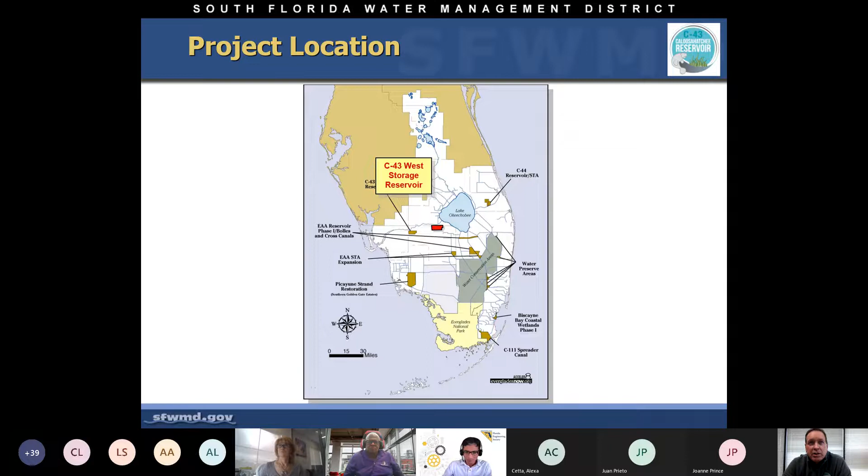Quick overview of the project location. It's located west of Lake Okeechobee, about halfway between Lake Okeechobee and Fort Myers, just south of the Caloosahatchee River. As we zoom in on the project location, again about halfway between the lake and the Caloosahatchee estuary.

There's a 10,000 acre footprint of a 2-cell reservoir planned, and it's under construction right now, just south of the Caloosahatchee River. It takes water out of the Caloosahatchee River that discharges or intakes into the reservoir. It captures basin flows out of the river, as well as Lake Okeechobee discharges, hopefully to diminish the amount of discharges that currently go out to the northern estuaries and south through the southern counties of Florida, to help improve environmental conditions in the estuary.

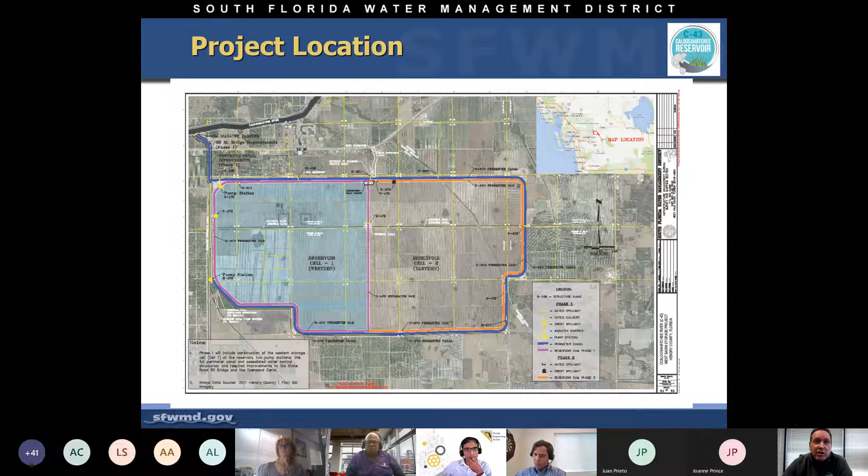An interesting note is that this reservoir is about half the size of the city of Boca Raton. It's almost 18 square miles in footprint, so it's a very, very large contract.

The main reason we're doing this project, it's a CERP project, number 1, so it's a Comprehensive Everglades Restoration Plan project. It's designed to improve the timing and distribution of flows into the Caloosahatchee estuary with attendant benefits throughout South Florida.

It was originally designed under Acceler8, back in the early 2000s, when the Acceler8 program had 3 major reservoirs: the C43, the C44, and the EAA A1 reservoir. This component had 170,000 acre-feet of storage, which is, if you had an acre of land, it would stretch 170,000 feet high into the sky. That's how much storage is captured in this reservoir.

It takes in the wet season flows and discharges them during the dry season to maintain minimum flows and levels in the C43, which thereby improves the salinity regimes within the estuary, improving the ecosystem.

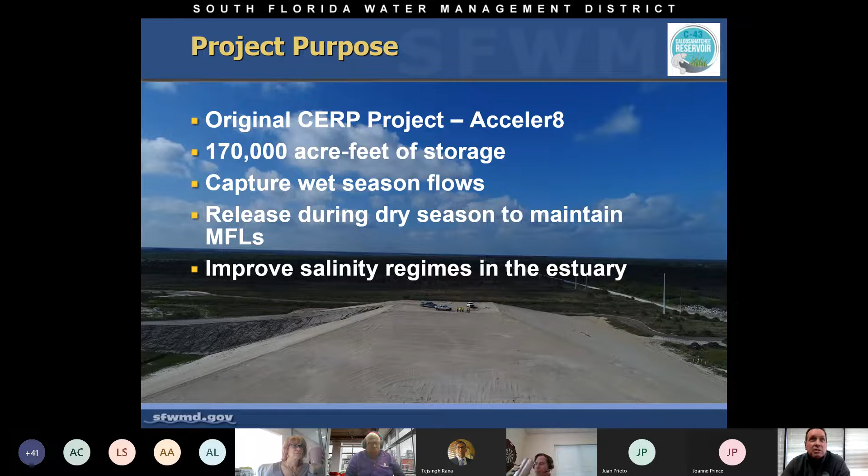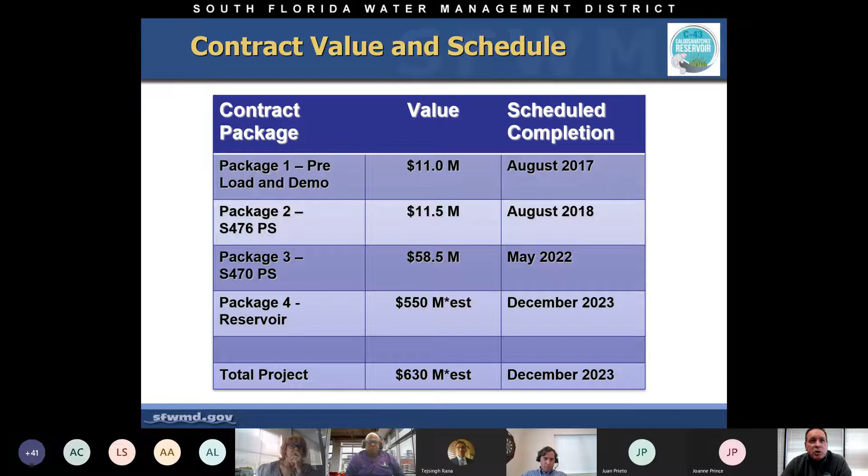As I mentioned, there were 4 major contracts that total about $630 to $650 million as of today. The total project budget is about $1 billion, which includes land, engineering, and a host of other smaller contracts that were advanced ahead of the Package 4 reservoir contract.

The reservoir, again about 10,000 acres or so, has more than a dozen water control structures, most of them pretty major, including the S470 reservoir pump station that we'll get into in a minute. That pump station is located right next to the Townsend Canal, the main conveyance feature south of the river, and it's designed to capture up to 1,500 cubic feet per second and discharge it into the reservoir. It'll take approximately 60 days at round-the-clock operation during the wet season in order to fill it.

The idea is to fill it about once every year and drain it once every year during its operational cycle.

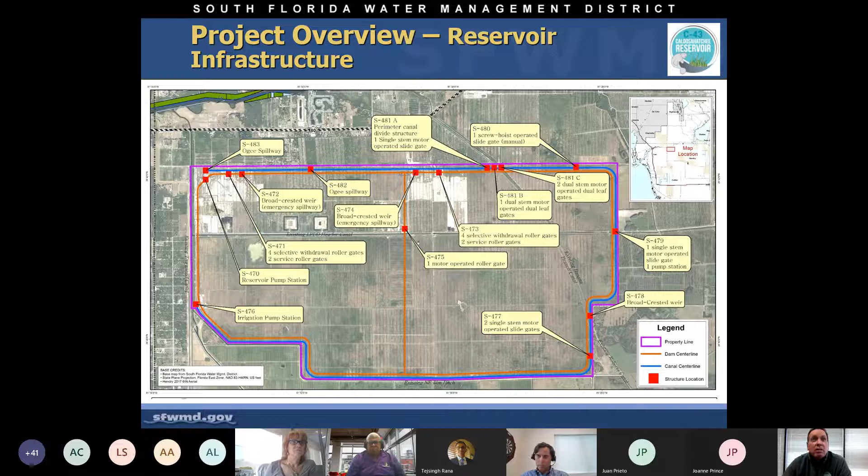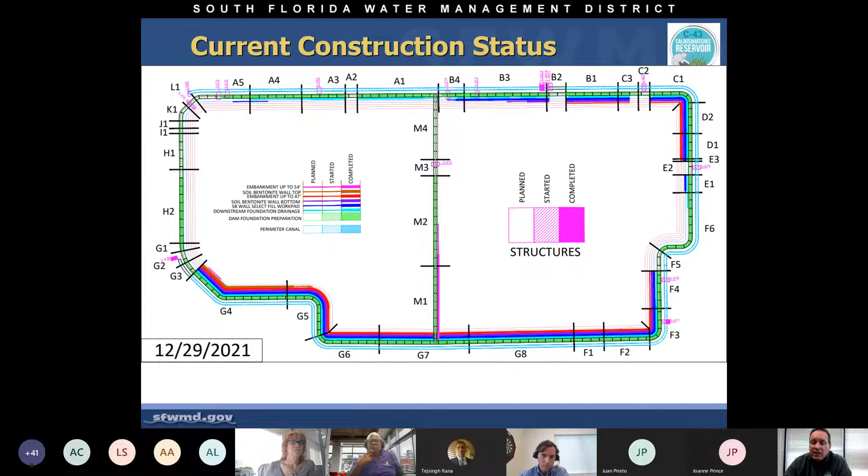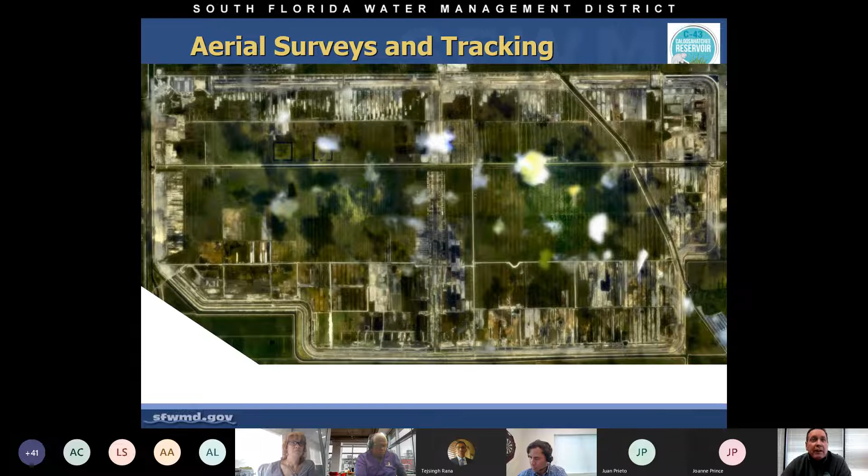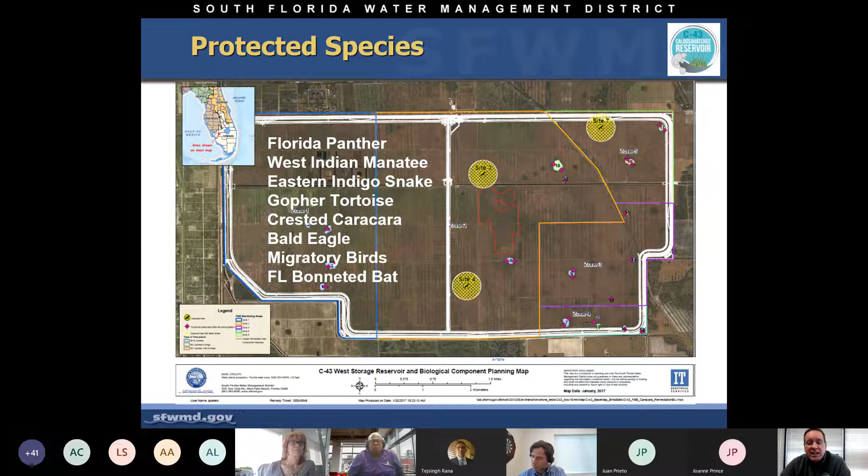Let me tell you a little bit about some of the protected species we've seen on the project. We've seen practically all the threatened and endangered species on the list for South Florida, including the panther, manatee, eastern indigo, gopher tortoise, and the like.

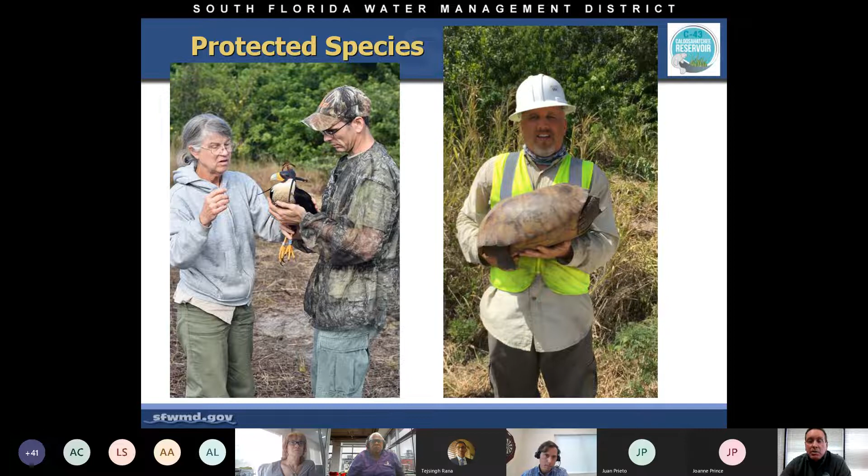In fact, we found one of the largest gopher tortoises recorded in South Florida on our project site, and she got relocated to a recipient site and is doing well. We have a family of panthers on our site as well, so that's pretty exciting.

The original design, as I mentioned, was completed during Acceler8, picked back up in the Restoration Strategies program for the district in 2014, and due to updates in the dam safety criteria after Hurricane Katrina, the project went through a total redesign for the reservoir dam facility.

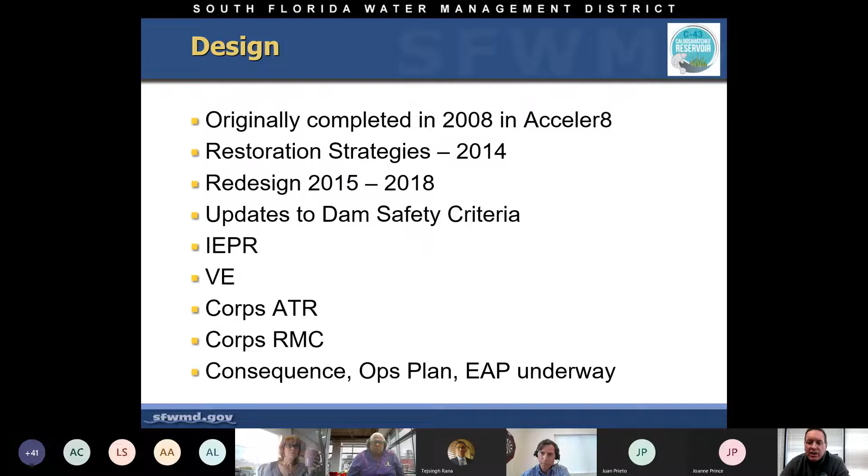We conducted IEPRs, which is the independent peer review, value engineering, and all of the Corps reviews necessary to pass scrutiny through the dam safety group. In consequence, dam breach and ops plan EAPs, which is emergency action plans, are currently in development.

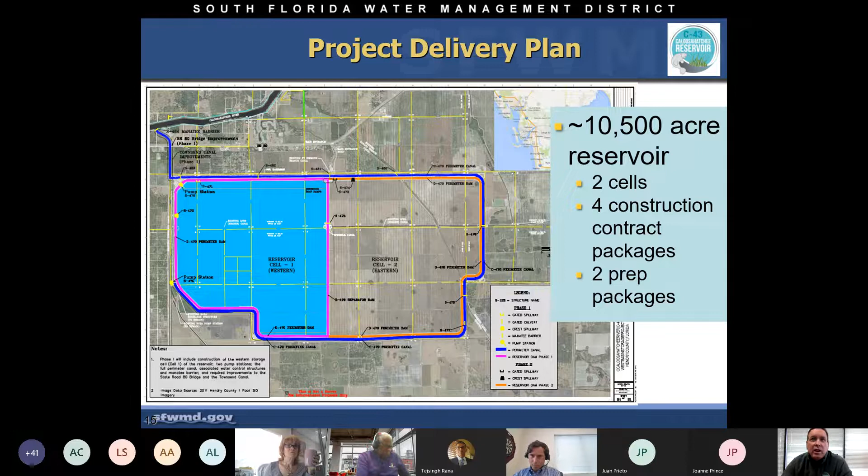Let's talk a little bit about the project delivery plan, the 4 major contracts for the work. This included what we call package 1, which was a preload and demo contract conducted 3 or 4 years ago now.

That was primarily to preload all of the structure sites within the reservoir dam footprint to consolidate the clays, which I'll get into in a little bit in the presentation, but to consolidate the clays so we could minimize the amount of future settlement once constructed.

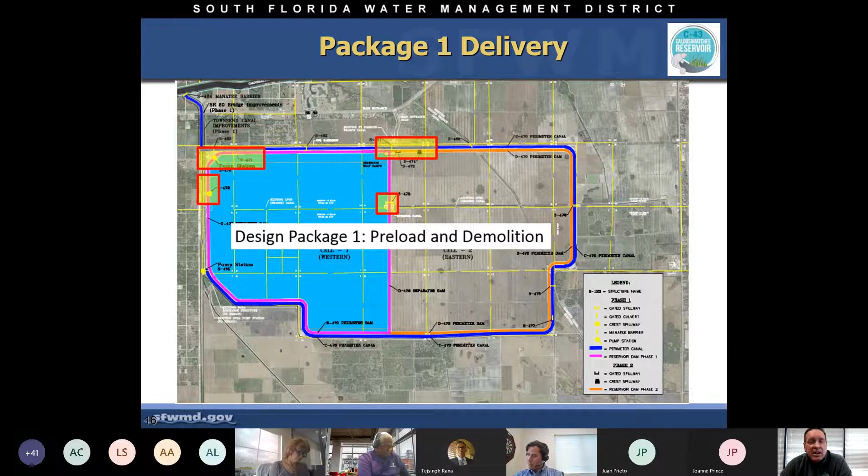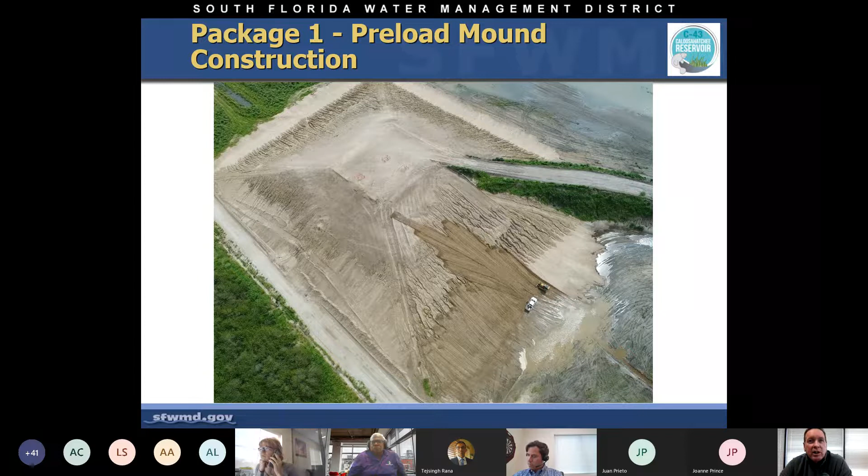These mounds were pretty large. They were 250,000 cubic yards each. They covered a footprint of almost 7 acres and were on the order of 50 feet high. Here's another picture just showing one of those mounds for one structure on site.

Those mounds were left in place for about a year or so in order to take out, again, the settlement due to clay consolidation. And we monitored those settlements for each of those mounds.

On this graphic, you can quickly see that the fill height, which is the orange line, as the fill was being placed, the settlement of the ground surface was induced up to almost 20 inches of settlement at each one. So you can imagine a structure in the dam settling 20 inches - that probably wouldn't be too good.

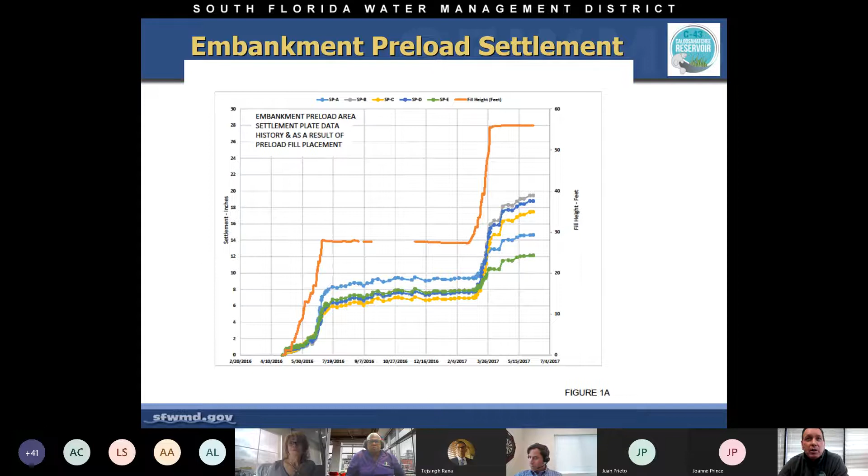So we took out the settlement and we monitored the clay layer to make sure that we dissipated the pore water pressures, and that's what this graphic shows.

Again, the fill placement through time, and then the representative piezometer readings. So as time went on, you can see the piezometer readings or the pore pressures dissipated, and that's what we're looking at during construction to make sure that the dam, as it's being built, settles as we predicted.

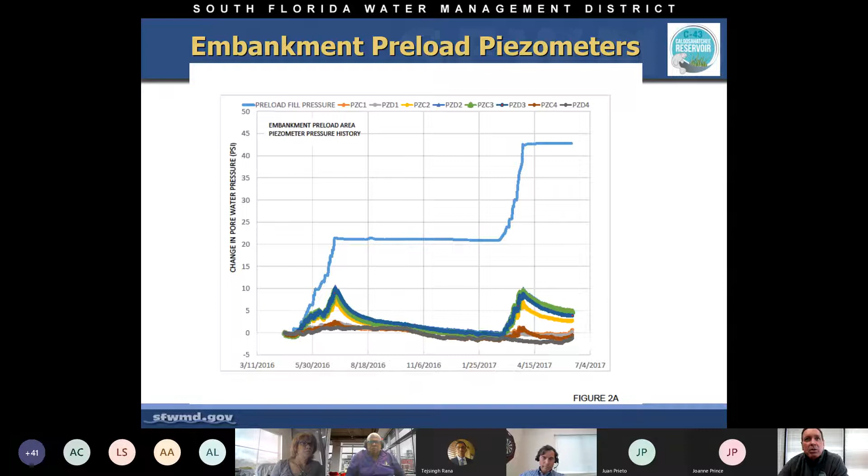Package 2 was a small, relatively small 200 CFS pump station. Its purpose is to tie in the southern perimeter canal, which is the southern blue line on this reservoir picture, to reroute water supply that had originally gone through the reservoir to the east. And that was critical because we had to maintain that water supply to the farmers on our eastern neighbor border.

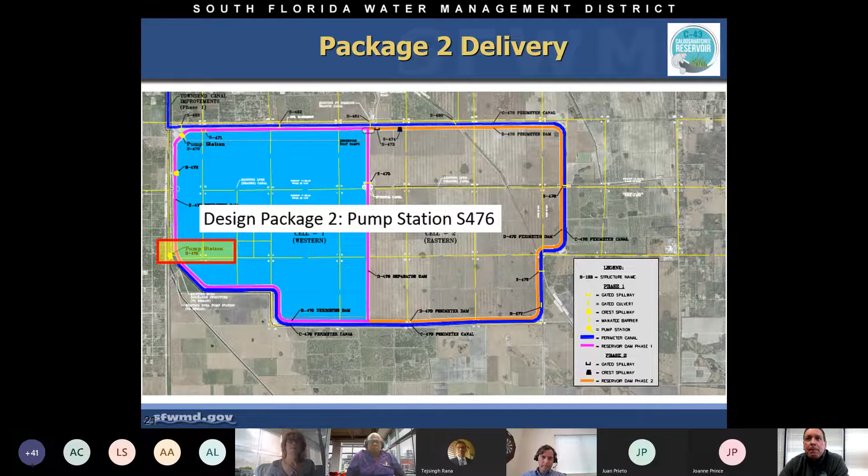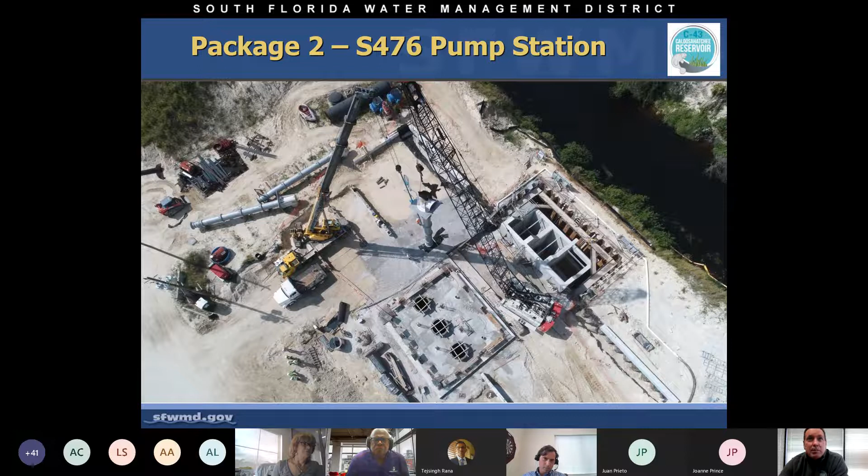This pump station was built a couple of years ago and is in operation. These are just some photos—I like photos better than lots of words. We had 3 vertical pumps at about 65 CFS each to give us close to 200 CFS capacity. You'll see a lot of our photos make use of drones, since everything's so big that the only way to really capture it is through drone imagery.

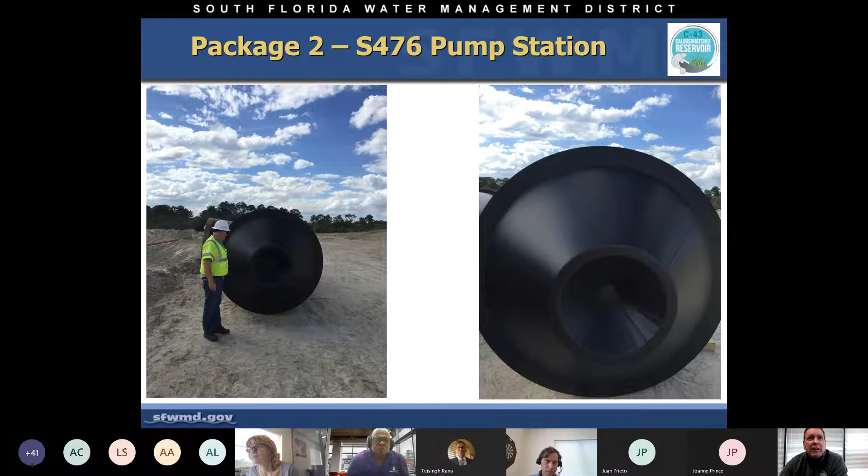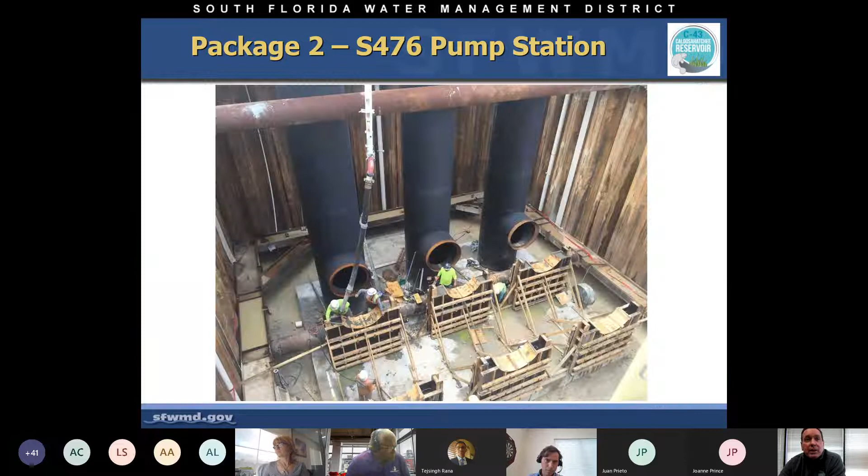This is an example of the pump tube, about 5 feet in diameter. This is a picture right from above as the concrete pump is pumping the concrete mix into the foundation for the pump station. Then we set the tubes, and this is the finished product.

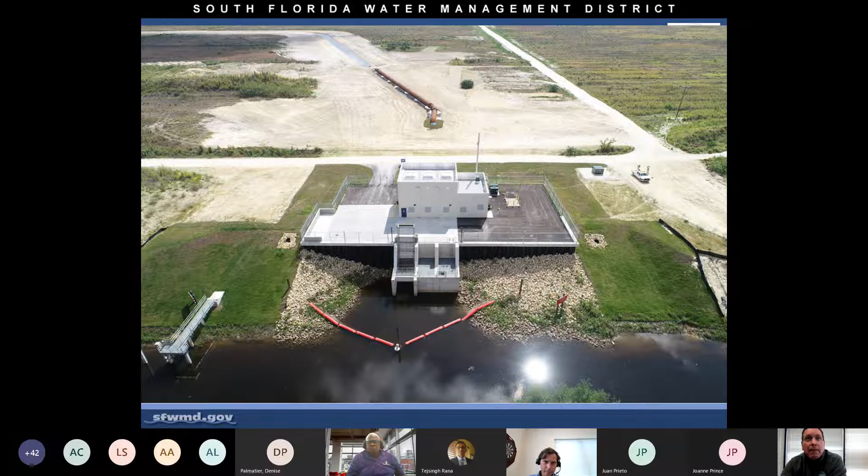The canal in the foreground is the Townsend Canal. It extends all the way past the intake at 470, which is the primary intake structure, and continues south to agricultural interests on the southern border as well. In the interim, you can see the orange pipe in the background—that's a 6-foot diameter pipe that discharges into a temporary bypass canal so we could maintain that water supply into the eastern properties.

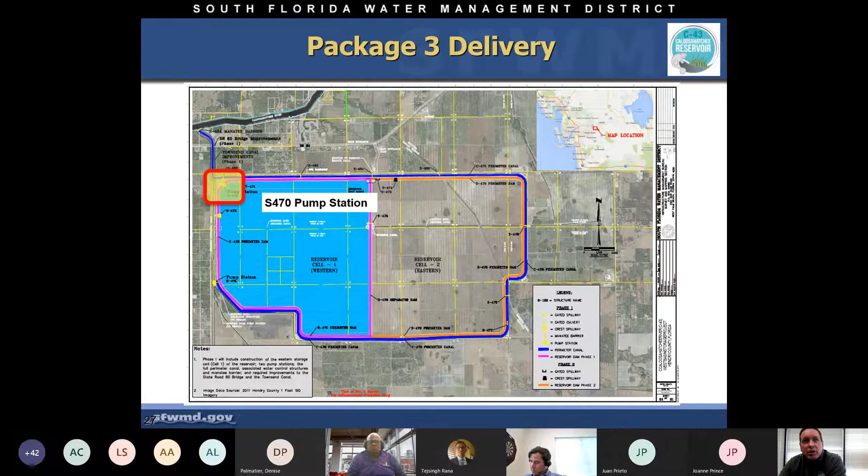Package 3 delivery was the S470 pump station, at the northwest corner of the reservoir. That was to take water out of the Townsend Canal, the dark blue north-south line that connected to the river, with the intent to discharge up and over the embankment. The pump station is built under package 3, while the embankment is built under package 4, so there's a lot of coordination between those two. Eventually, when the dam gets completed near the pump station, we'll install the pipe and connect it to the reservoir.

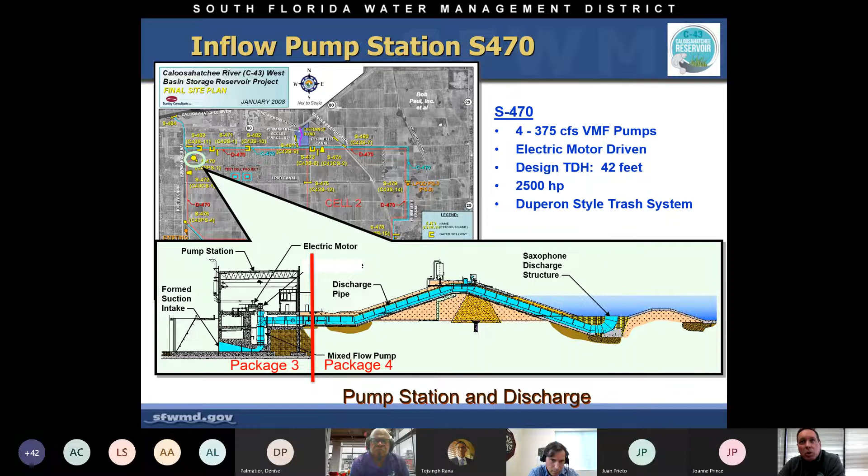There are 4 pumps at 375 CFS each, electric motor driven, with a total dynamic head of 42 feet. What's spectacular about this project is that each of those pumps is a 2,500 horsepower electric motor. We'll get into what we had to do about that in a second.

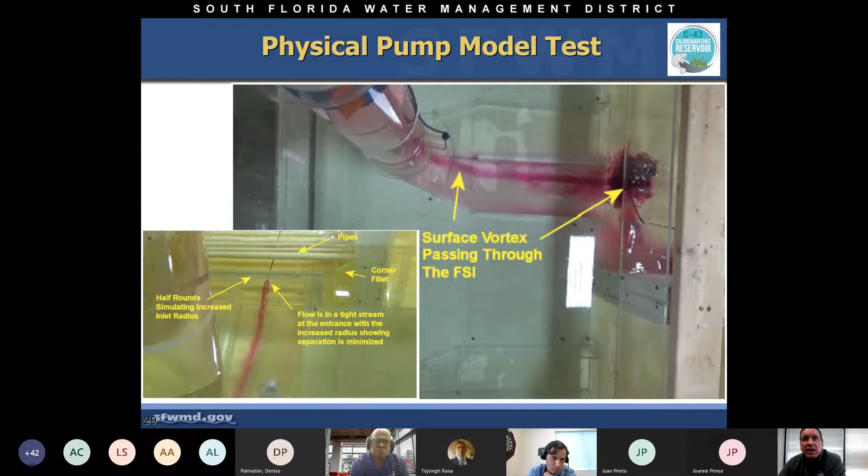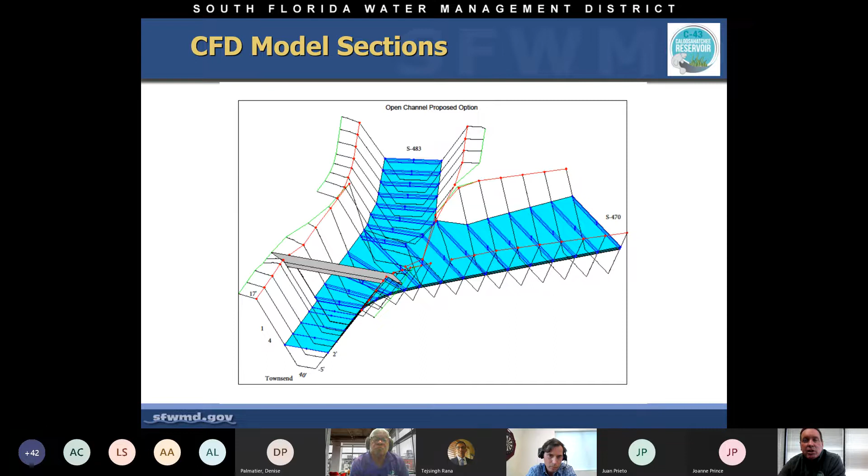During design development, we looked at physical pump model tests to maximize efficiency, since 2,500 horsepower per pump—10,000 horsepower total—is a pretty hefty electric bill to run. We did extensive modeling to design the formed suction intake, and vortex breakers into the pump station. We also used CFD to develop the discharge, shown on the right—the S470 intake and the 483 discharge in a combined canal that eventually connects into the Townsend. From that analysis we determined flow velocities to design our erosion protection and riprap, and to ensure adequate capacity in the intake and discharge for the reservoir.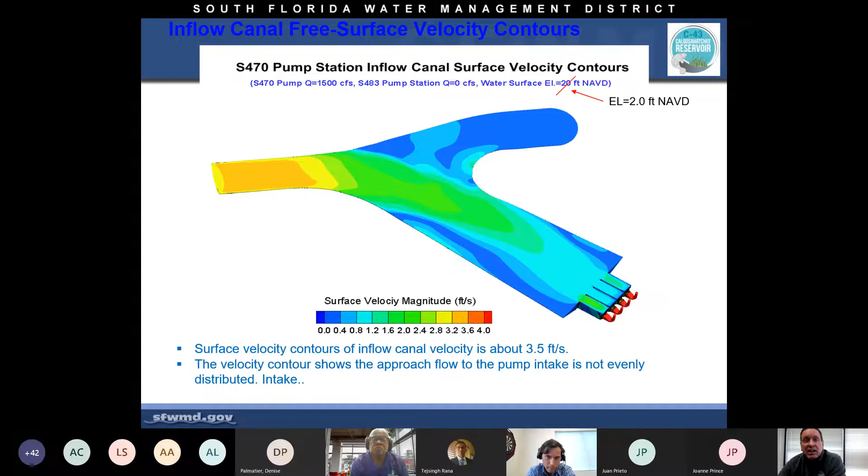I mentioned the electric power—we ended up having to build a dedicated substation, which cost about $5 million. I'll show you a picture of that in a second, along with a lot of optimization on the intake system, and evaluation of the Townsend Canal conveyance capacity, which resulted in some upgrades to that facility as part of the project.

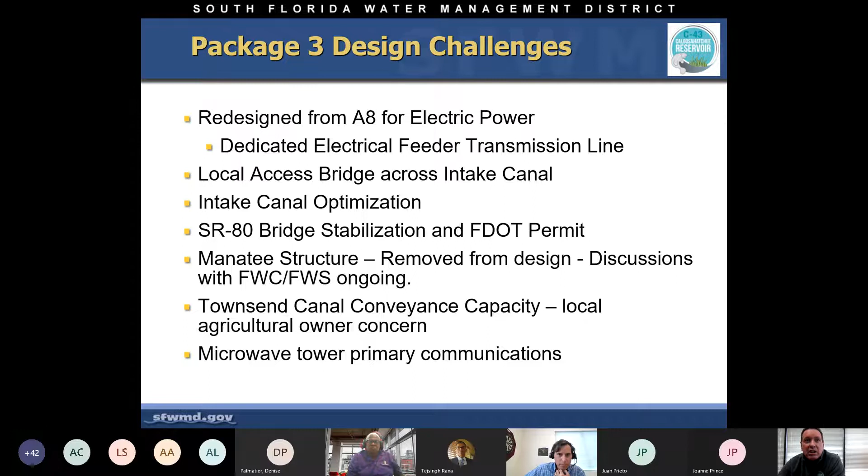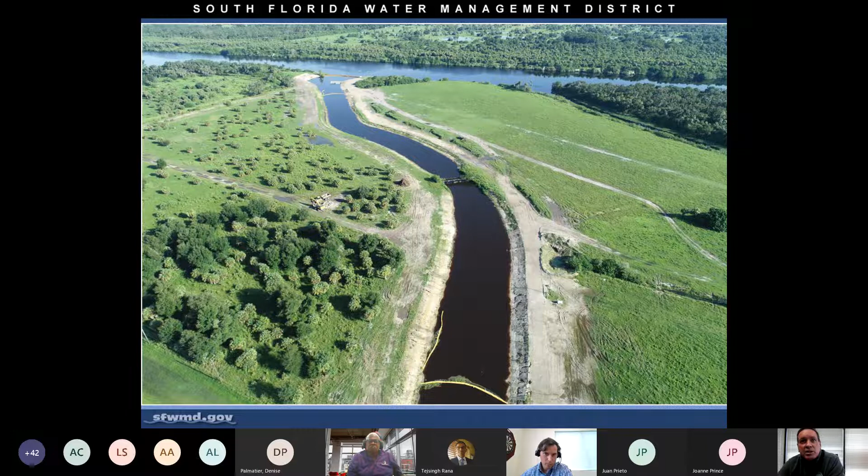This is the Townsend Canal on the northern segment that connects to the river. The C43 River is actually in the background of this photo, and the Townsend Canal runs south to our reservoir project. This canal had to be improved, as you can see, to make sure we had adequate capacity within the facility.

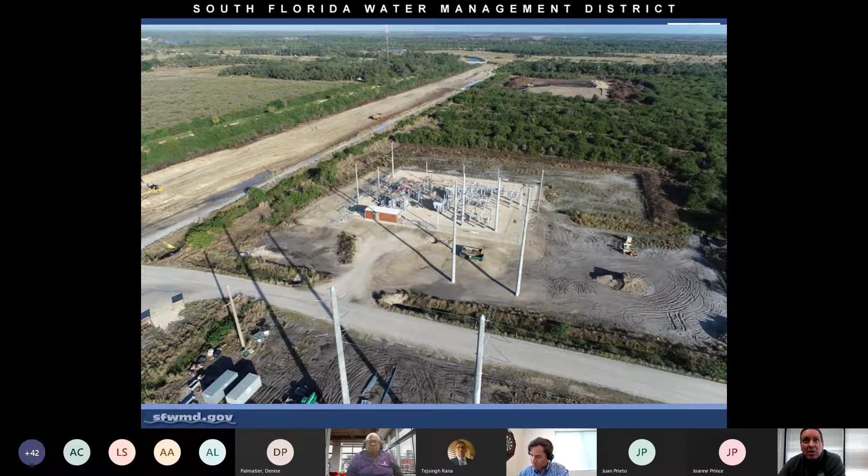The substation I mentioned—FPL determined that if we had taken power off the transmission corridor that runs north of the reservoir directly into the pump station, it would have resulted in a brownout to the city of LaBelle. So we had to build our own substation to knock down the power before bringing it to the pump station and minimize flicker with our neighboring communities.

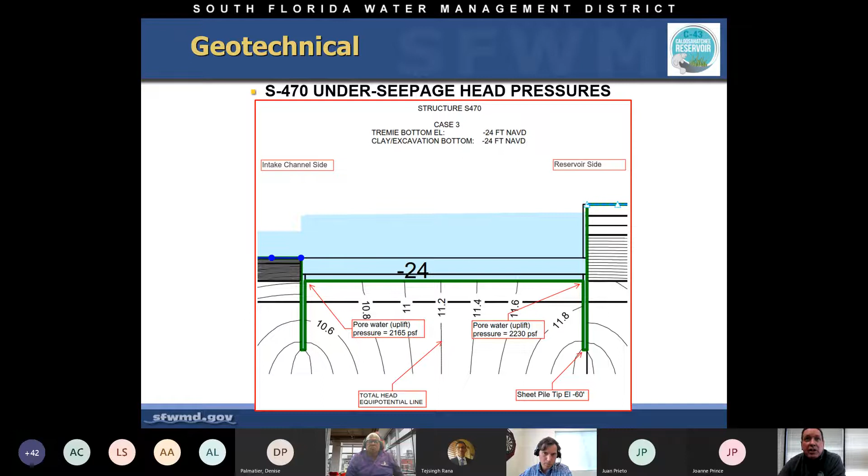Some of the other challenges were on the geotechnical side. Because we had nearly 40 feet of head in the reservoir and then some, we had significant uplift pressures exerted on the foundation of the pump station, so that had to be designed to make sure we didn't lift the pump station from its location.

Getting into an early construction photo—this is an aerial of the base slab being poured. You can see the line of concrete trucks, CEMEX trucks, circling around the yard, and those were placed mostly during the night.

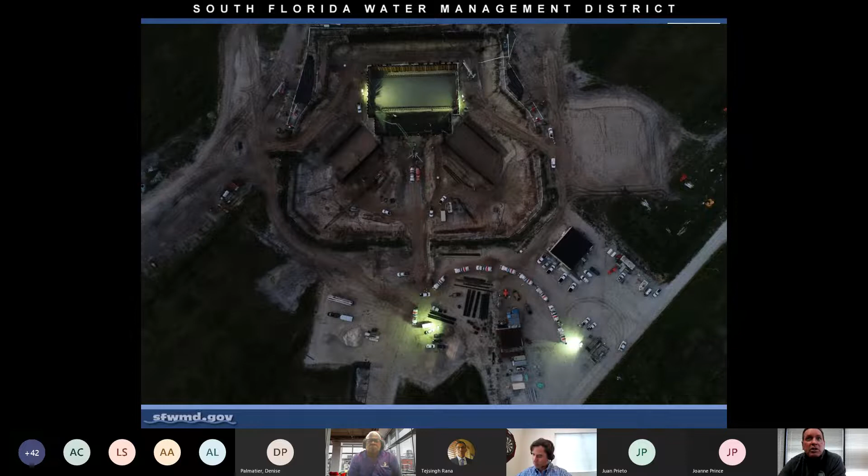We found that our night pours on our major concrete pours were most effective for minimizing temperature problems with the concrete mix. Here's just a photo of some of the FSIs and the intake bays for the pump station, just to give you an idea of the scale.

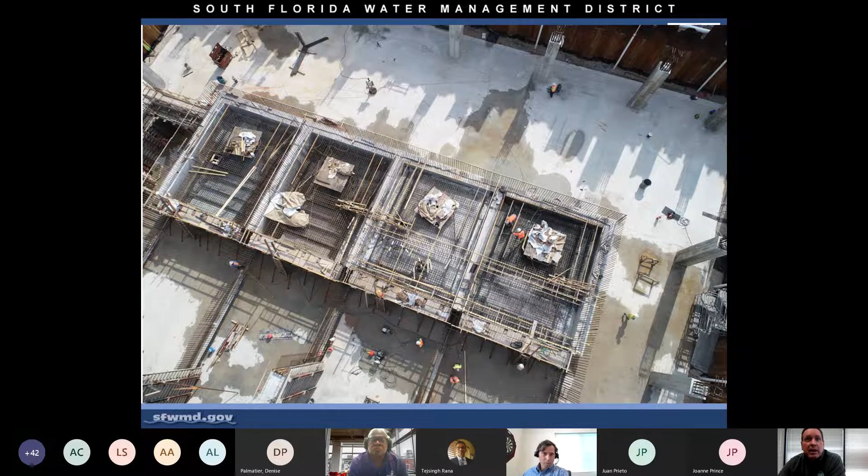You can see the people below, just to give you a scale of the size of this facility. Again, each one of those 2,500 horsepower motors serviced a 7-foot diameter pump that discharged to the left pipe within the pipe gallery, discharges to the downstream side of the reservoir, of the pump station.

This is what the downstream side of the pump station looks like. For now, we've installed a manifold, an 84-inch diameter manifold that will be removed once the dam is constructed, which won't be too far from the back side of this pump station. So you can see we're already preparing our dam foundation to the lower left, and that's how close the dam will be to the pump station.

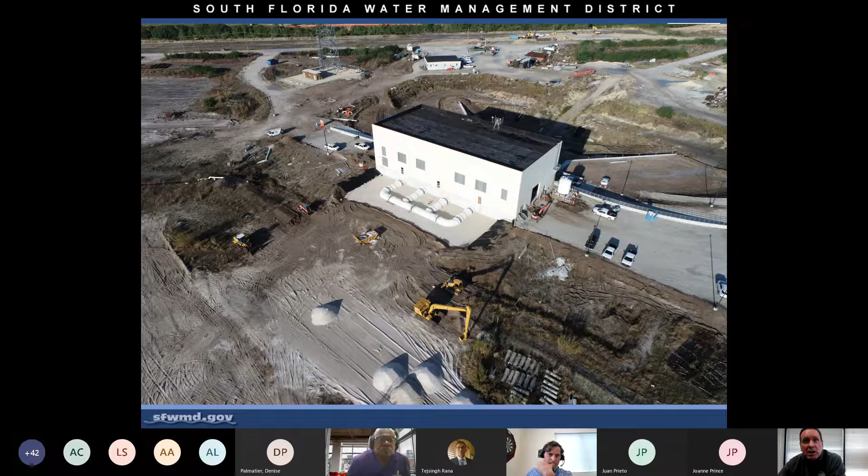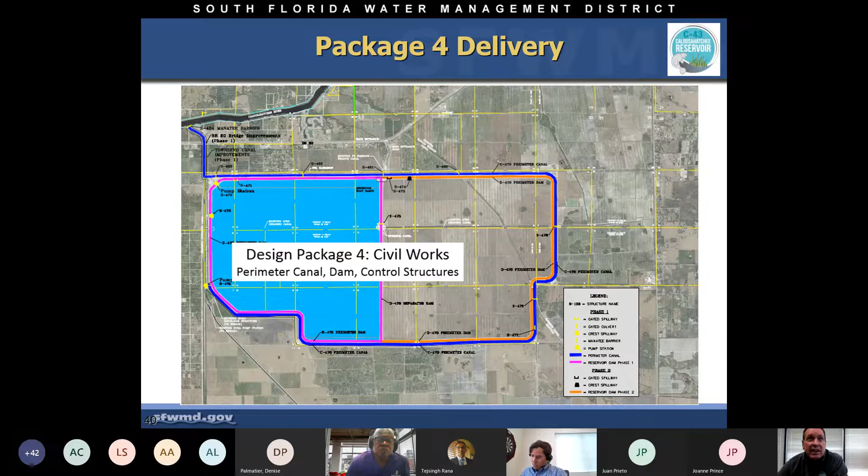Package 4 is the dam. That's the big one, the $500+ million contract, and that was let in 2019. We're about 40% complete on the project.

One thing I'll share really quick is that clay layer we talked about. We've got about 16 feet plus or minus of sand and weathered limestone from the surface down to the top of the clay. The clay is our gold dirt. It's almost entirely uniform across the 10,000 acres, which makes it very unique in that we can get 18 square miles of a clay liner not too far below the surface of the dam.

So that's the good part of the clay, not the settlement part. The cutoff wall that we'll show you ties into that clay layer, effectively making a seepage-free bathtub.

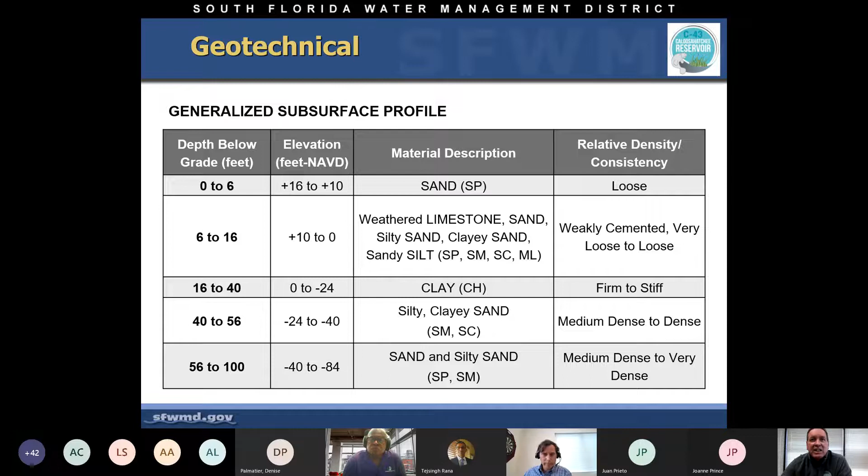This is just a quick cartoon cross-section of what that dam looks like. It's a 3-on-1 side slopes, an elevation of 54, with a ground surface average of about elevation 20. We've got a bentonite cutoff wall that ties into the existing clay layer, along with a backup chimney drain and toe ditch to capture any seepage that may penetrate or escape the cutoff wall.

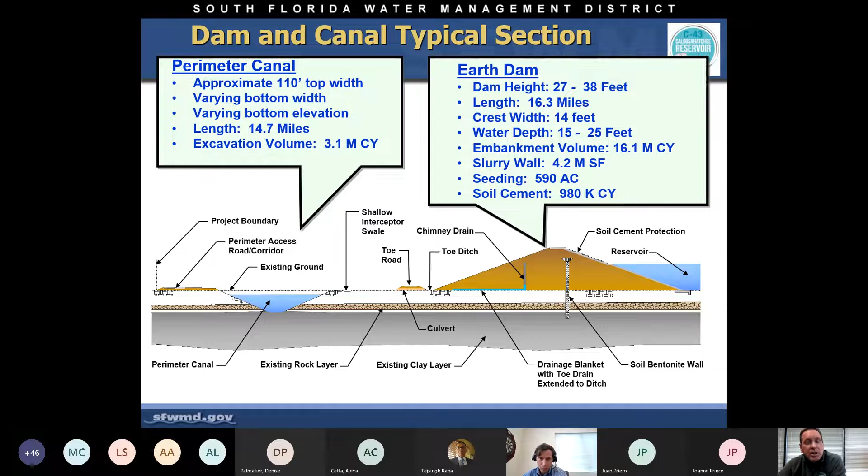There's a perimeter canal on the outside that collects flows that might enter into the seepage canal, as well as agricultural flows, and we'll show you in a minute also water supply deliveries. Total volume of earthwork is about 20 million cubic yards. We'll probably move closer to 30 million cubic yards. We expect to use almost 30 million gallons of diesel fuel to construct the project.

This is just a close-up cartoon of the internal features of the dam. Again, the water surface elevation is about 20 feet or so above the existing grade.

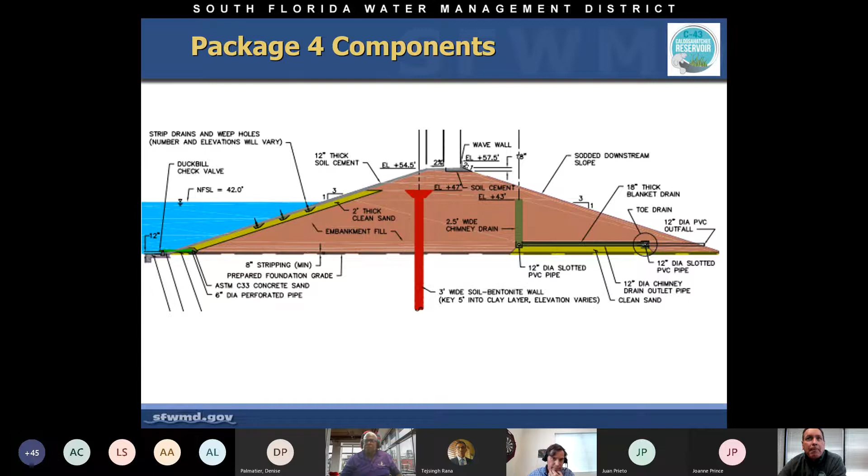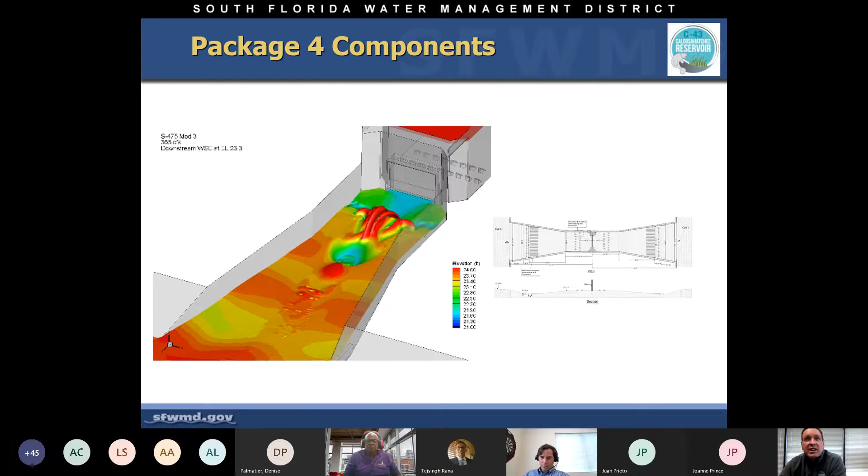We did some fancy CFD to evaluate some of our structures. This one happens to be the structure that divides the two cells, just to make sure we're adequately protecting against erosion. When one reservoir cell is full and another is empty, we could have as much as 20 feet of head against that gate, and we needed to make sure we protected the dam appropriately.

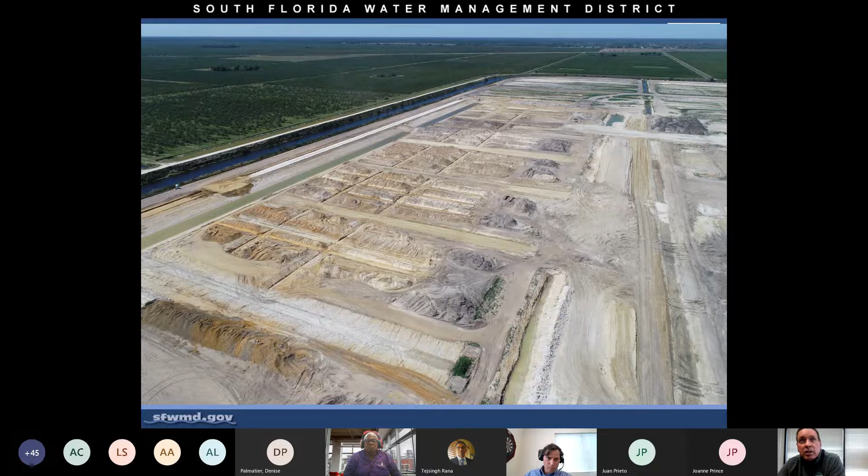For that one, and we'll go right into the foundation prep. This was an old citrus grove, all 10,000 acres of it, and we had to remove all of the underground irrigation pipes within the citrus grove. They were spaced every 50 feet or so, so we had to dig up every single one of the pipes before we could prepare the foundation, dig them up, and then backfill them to create a suitable dam foundation.

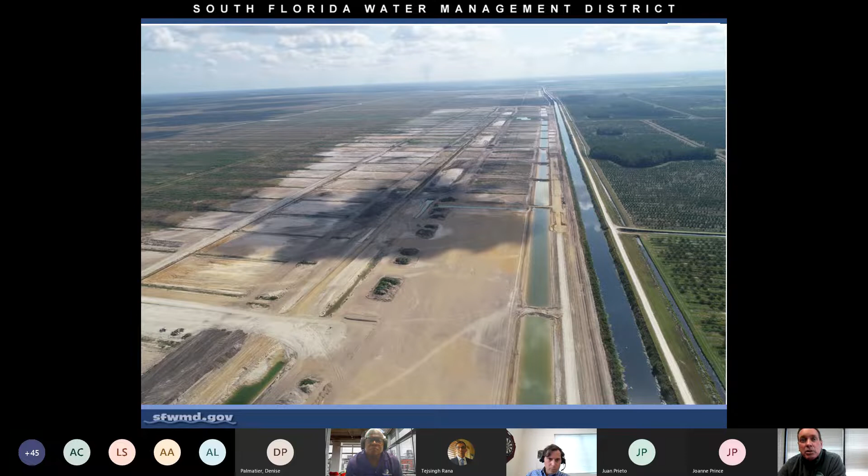This is an aerial picture of a completed foundation segment in the foreground. After we've done our remediation, we come in and proof roll, and we're ready to fly each segment. Once we're done flying each segment and doing our foundation mapping, we're ready to start building the dam.

This picture shows one particular segment that shows the placement of the drainage blanket on the downstream toe. The white sand material is the drainage blanket that we're getting from Ortona, Florida, about 20 miles away. And then as you go up the view, that's the dam itself, or at least the dam footprint itself.

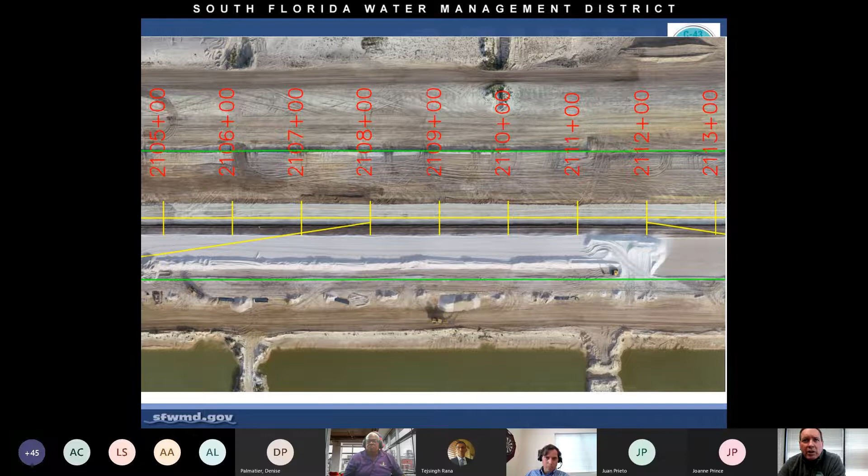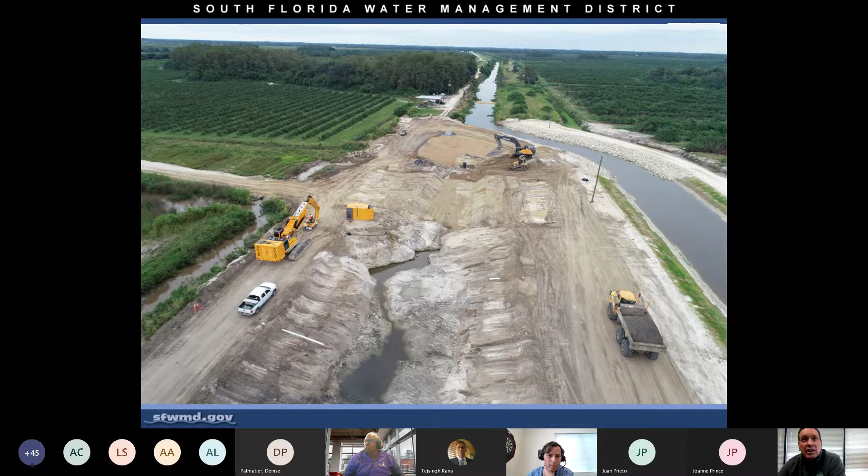In the very foreground is the perimeter canal, constructed in segments. We also had to do a bunch of workarounds in order to capture this. On the right-hand side is a drainage feature we call the Roberts Canal, which actually runs through the reservoir footprint. It needed to be rerouted around the reservoir into a new perimeter canal in the foreground to bypass those flows.

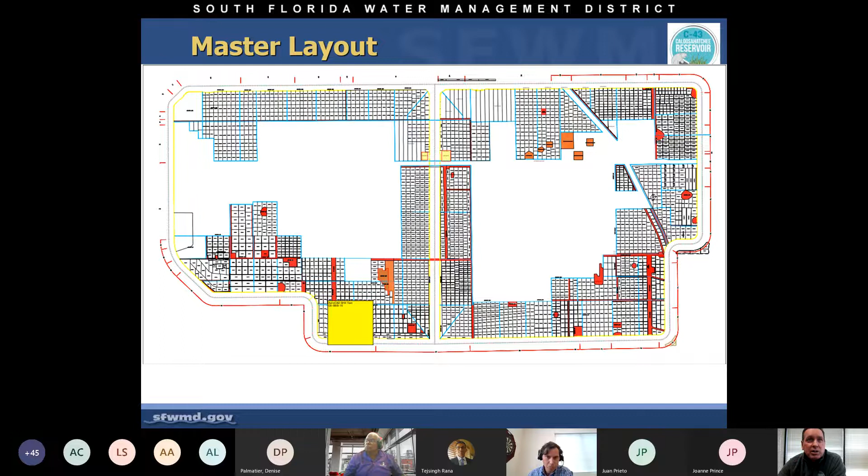So we have water supply going through the reservoir, as well as drainage, that needed to be managed. We have what's called a master layout - I know you can't see what's in each square, but each square is a borrow location on this footprint, and each one is cataloged with a qualification associated with it, which is the material we use to build the various parts and pieces of the dam.

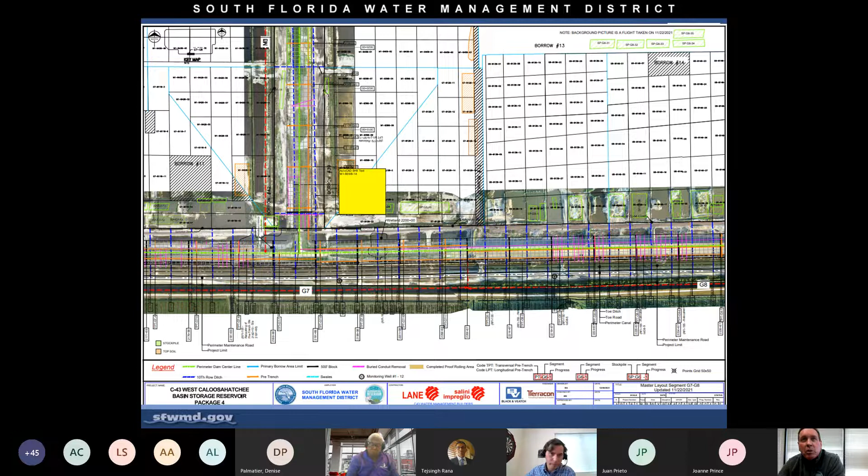Zooming in on one 11 by 17 segment of our master layout gives you an idea, once you overlay the aerial view, of where the spoil piles are and what their designations are for placement in the dam. Each one of these locations or piles is tracked, so we know where the material came from and where it went in any particular segment of the dam.

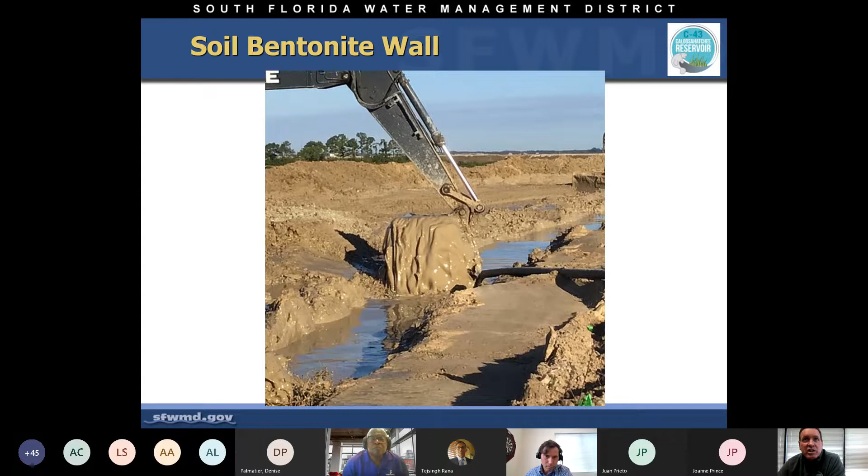Quick look at the soil bentonite wall, probably the most important feature of the dam itself. It's designed to prevent seepage through the dam. It's also the least, or the lowest tech, construction you'll see - a very, very sloppy operation. We just have a trench with slurry and lots of mud.

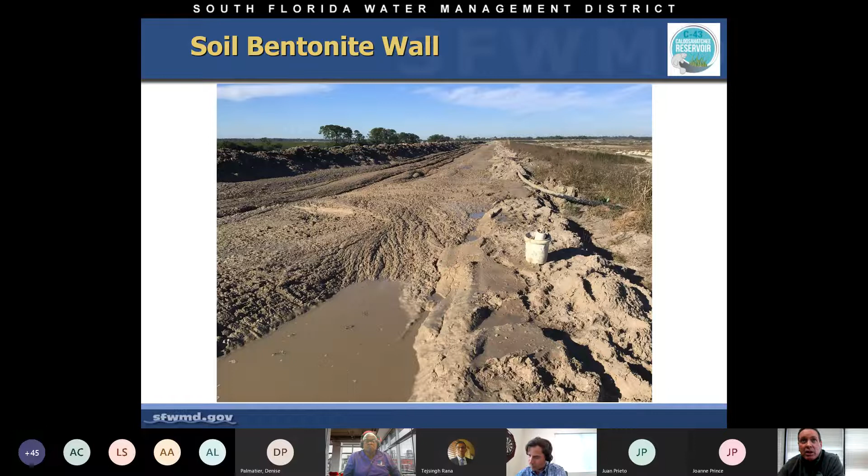Once the trench is backfilled with a bentonite and mud mixture, most of that mud comes from the clay layer we've keyed into below the footprint of the dam, and that becomes the basis of the cutoff wall. We actually build it in two pieces. This piece shows the segment that goes from grade all the way down to the tie-in, and then once we build the embankment on top of this, we build a phase 2 cutoff wall that ties into the first one. This is maybe a better perspective showing the blanket on the right, as well as the cutoff wall activity on the left.

It's simply just mixing that mud with a bulldozer and pushing it back into the trench as they move. They were producing about 200 feet a day of cutoff wall. That's currently going on right now.

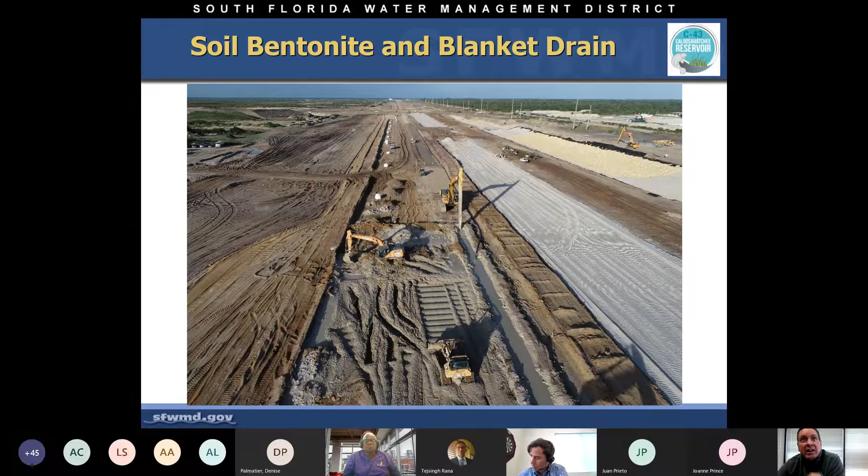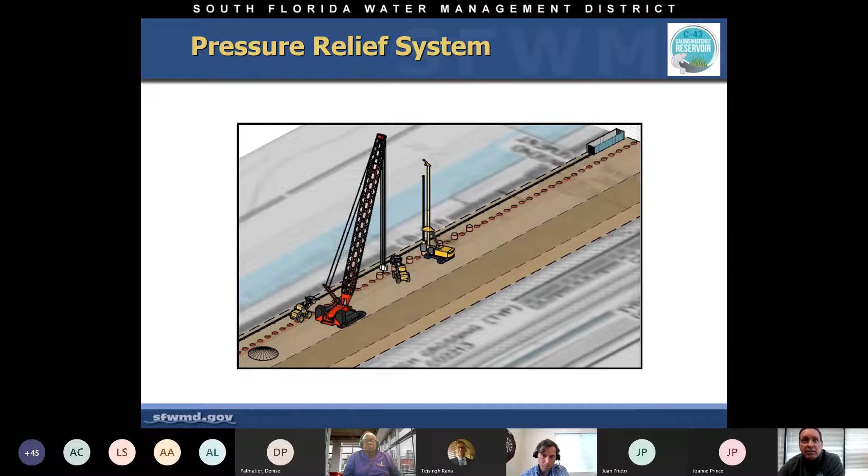We also have a lot of riprap. All of our channels are lined with riprap. And we also have a pressure relief system on the Townsend Canal side - we've got over 40 feet of head. The idea is to relieve the pressure under the confining layer, the clay layer, through sand relief columns that exit at the ground surface. This is a little graphic showing how that's supposed to go together.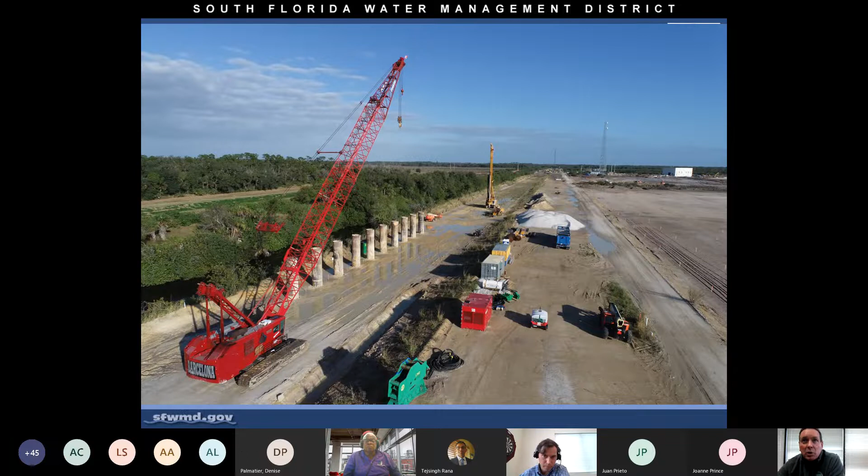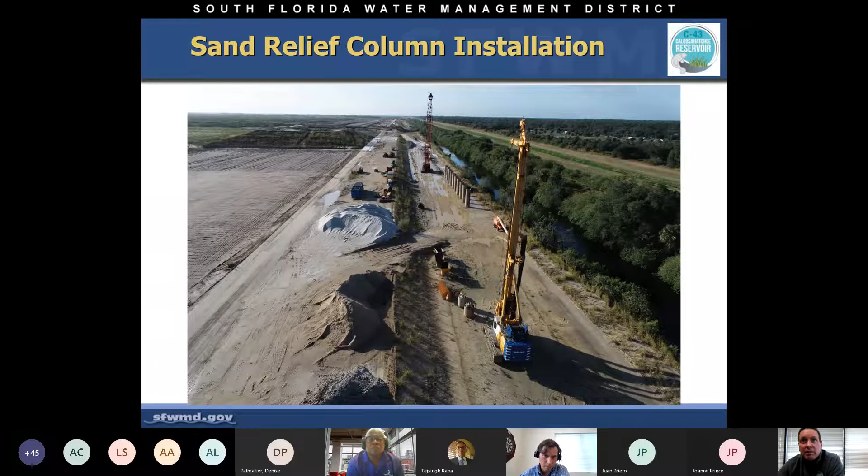This is a picture of us just getting started with what we call proof of concept. Each one of those columns gets drilled to 60 feet deep and then filled with filter sand - there's a big pile of it in the background to create that sand relief system. That's underway right now, and here's another perspective looking in the other direction. They have to drive the casing and then drill it out with the machine in the foreground.

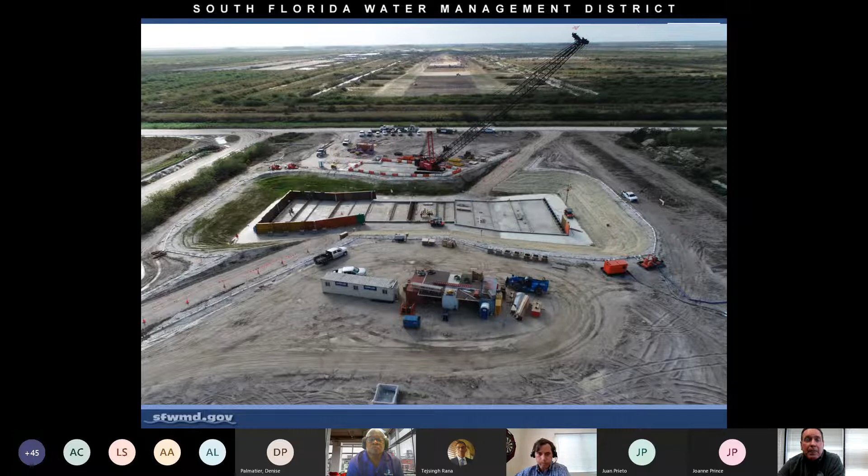Again, we have some other major water control structures. This is called S475, the divide structure between the two cells, and that's just getting underway right now. Here's a couple of photos of some other water control structures along the perimeter, and you can see the dam construction going on.

Shawn, you're muted. Shawn, you're muted. Is that better? Yes, sir. Sorry about that, must have pressed the wrong button. We lost your screen too, I think, Shawn. Is that better?

Yes, we can hear you and see you again. This is a picture of the demo of the existing pump station at the western side of the reservoir. That was the original water supply to the farms to the east.

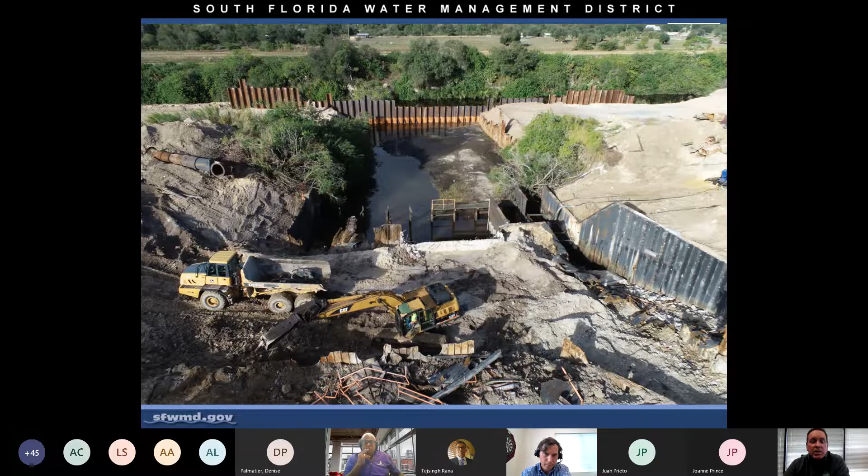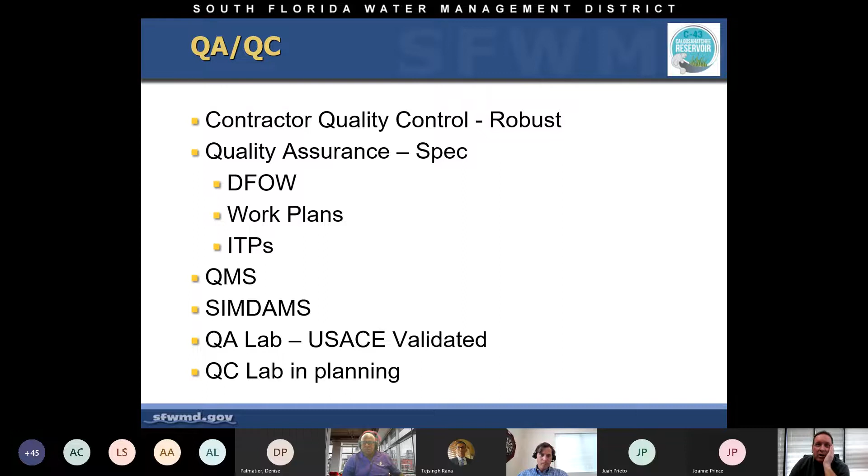Quality control and quality assurance is pretty heavy on this job, very robust. We have to do it in accordance with the Corps of Engineers requirements. We developed our own plan. We have our own validated quality assurance and quality control labs on site. And we have a very robust data management system to handle what we anticipate to be over 100,000 test records required at the end of the project.

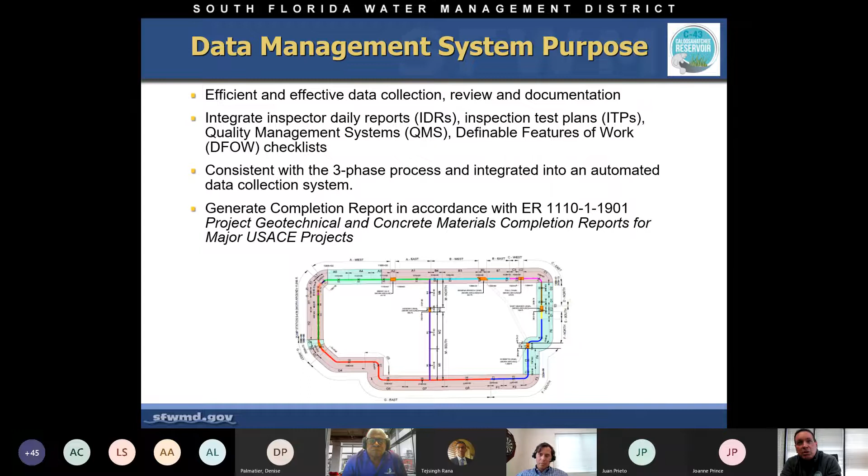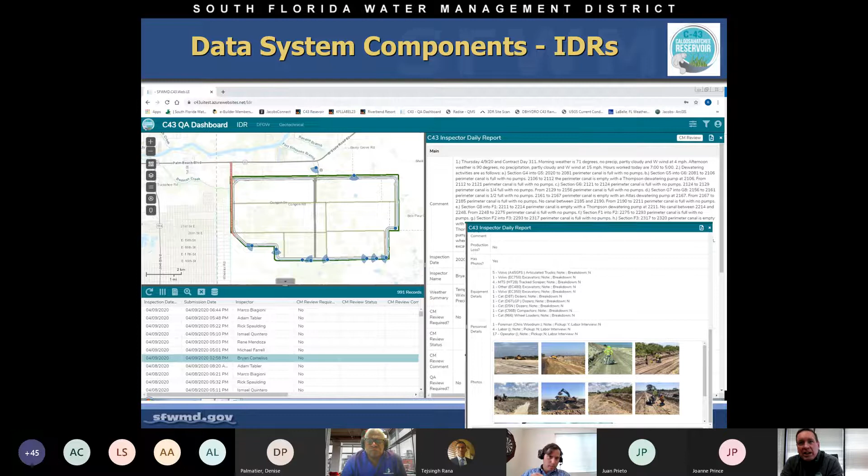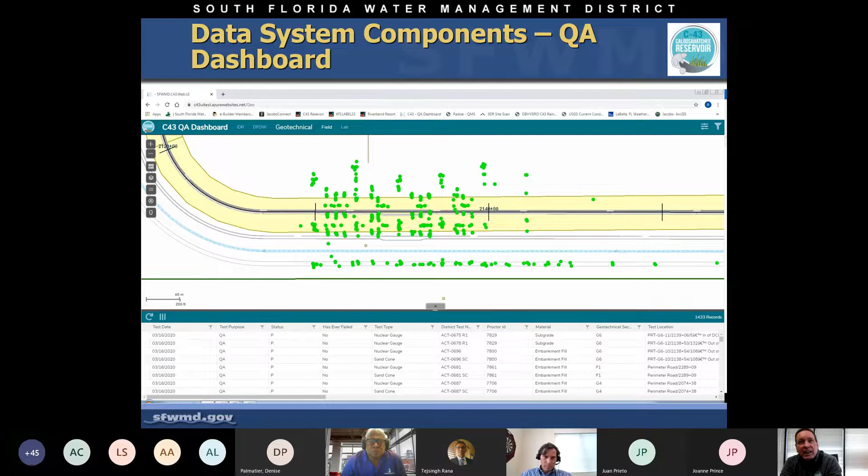It's just a quick screenshot of what our dashboard looks like. So at any given location, we can identify where photos are taken or where daily reports are recorded. And this is very searchable. It can be reviewed by the project managers in West Palm Beach, as well as serves as a repository for all of the reporting. This also shows where all the tests are located at any given segment and their disposition, whether they passed or failed. And that continues for the entire footprint of the reservoir.

And that's what I had for a presentation for today. So thank you very much.